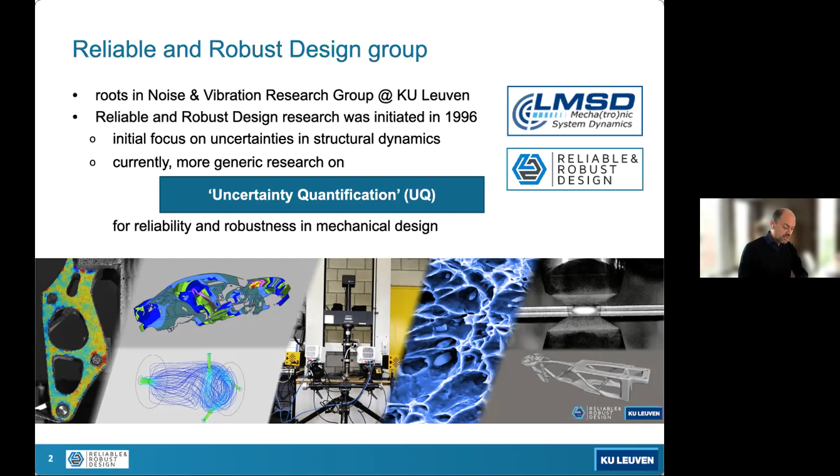Maybe just to give a general overview of who we are, part of a research group, Reliable and Robust Design Research Group, part of a division that is mainly working on system dynamics. So that's also why many of our applications relate to dynamical simulations, but we are broadening towards many other domains currently as well.

We have been doing uncertainty quantification research for quite some time now, and currently the main objective of what we are doing is to bring these simulation techniques, design techniques that introduce uncertainty into the design problem closer to industrial practice, design in industrial practice, but also manufacturing practice, because we see a lot of challenges there in manufacturing.

On the one hand, you have quite fancy manufacturing simulation tools. One of the tools we are working on, for instance, is the welding simulation. They can predict quite in detail what is happening during the welding process. But of course, you are facing a lot of uncertainties there.

So we are not only focusing on the design aspects, what you can do with numerical tools in design, but also in process simulation, for instance, lately.

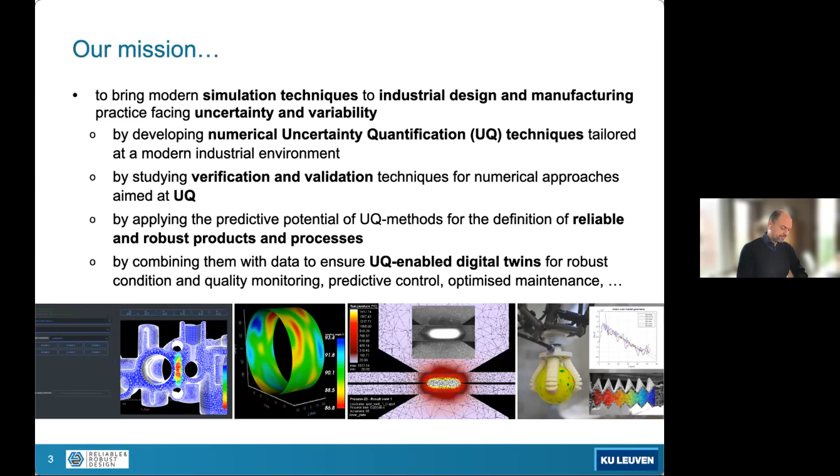One of the goals in this respect is, for instance, to look at UQ-enabled digital twins for process monitoring, to make sure that we are assessing the process correctly, and also that we are looking at the uncertain aspects in what we are monitoring, apart from the other topics that you see on this slide.

The topic I want to talk about today is about interval finite element models, that's mainly what we see in the topic of designing under uncertainty. And it's basically an answer to several challenges that we have nowadays.

We have quite fancy high resolution numerical techniques. So somebody who is facing a design problem under uncertainty usually does not want to reduce the dimensionality or the size of his model to take uncertainty into account. So somehow we have to deal with that.

On the other hand, there's a lot of uncertainty nowadays that cannot be quantified by a single scalar anymore. So we have already heard the talk about random fields. In many cases, it's spatial and heterogeneous, also because in many cases we are facing manufacturing uncertainty.

The typical example that I usually give is the one of additive manufacturing, where you typically have intra-variability within a component. If you look at the design or at the build of additively manufactured components, you very often have variability within the component due to thermal effects and so on during the manufacturing process. But also, for instance, the welding process that I mentioned earlier, of course, is vulnerable to this.

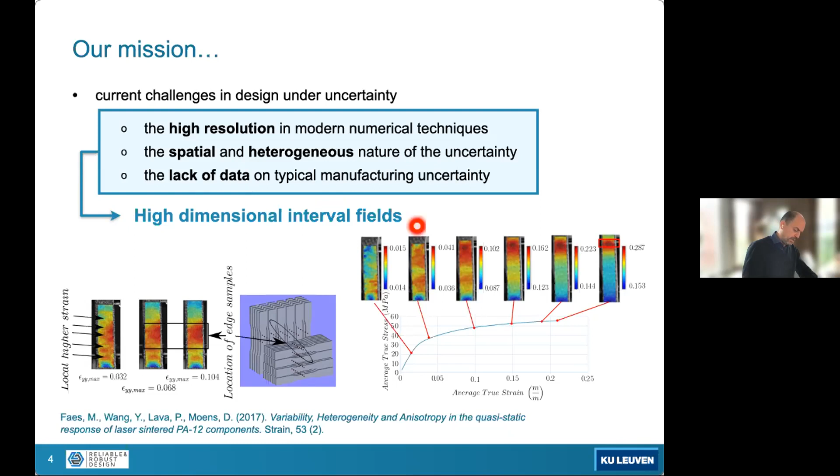And on top of that, you very often have lack of data. So you don't really have all the details to model this, for instance, using random fields. In that case, one possible answer could be the use of high dimensional interval fields.

Let me talk about those and try not to dive too much into the technical details here, but just want to give you a general overview of what interval fields are, and what we did recently to make them applicable in the context of industrial design. And I will show you some applications.

First of all, the main idea, of course, we start from a non-intrusive approach. This means that we start from a nominal case, which is just a finite elements calculation as you would have it from a commercial package. That's the core of the methods, and we try not to be intrusive. That's, of course, the main idea when you want to make something applicable in industry, for instance.

Then, of course, we all know that we can model uncertainty with a probabilistic concept. We focus here on intervals. Intervals make the quantification of the uncertainty at the input side a little bit less challenging, and you only have to know a lower bound and an upper bound. In that respect, they are often rather regarded as sensitivity studies or some large-scale sensitivity studies, rather than actually quantifying, for instance, the probability of failure. This is something, of course, they cannot do.

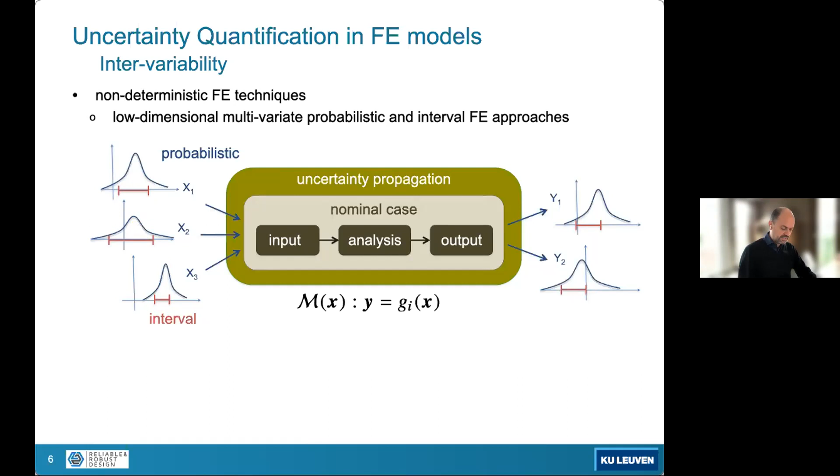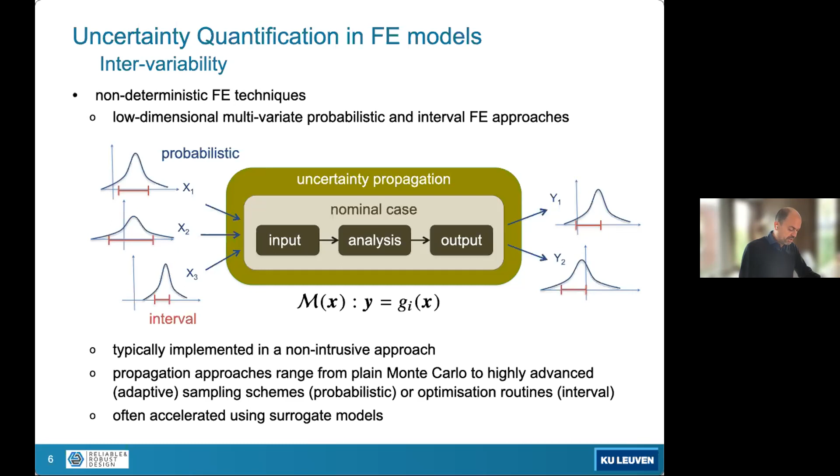So what you put into the model typically are intervals, and what you get out are usually also intervals, since we do this non-intrusively. How to propagate is one of the challenges. You can do sampling, but also highly advanced adaptive response surfaces, which is something we are focusing on recently. Many approaches are applicable, but I do not want to focus on the propagation part in this presentation. I'd rather focus on the definition of interval fields at the input side.

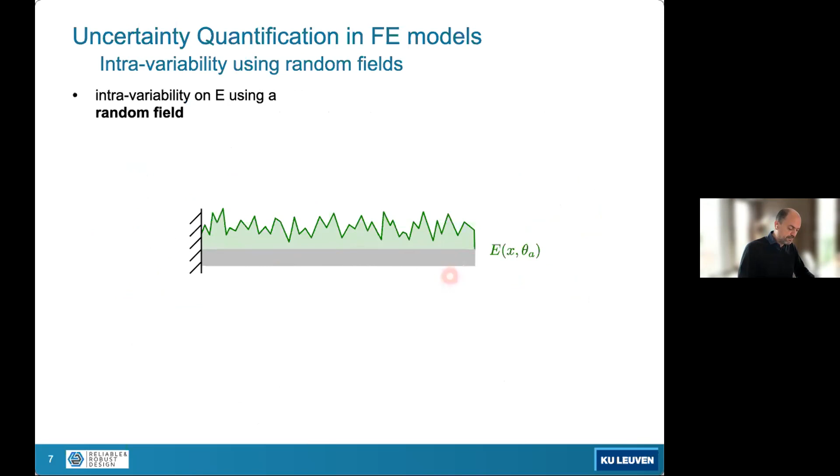I started by looking at random fields. What is a random field? We are quantifying a spatial variation. For instance, in this cantilever beam, we have an E modulus which is spatially varying. We consider every possible realization of that variation and try to have it represented by a collection of correlated random variables over the continuous domain, which then defines our random field.

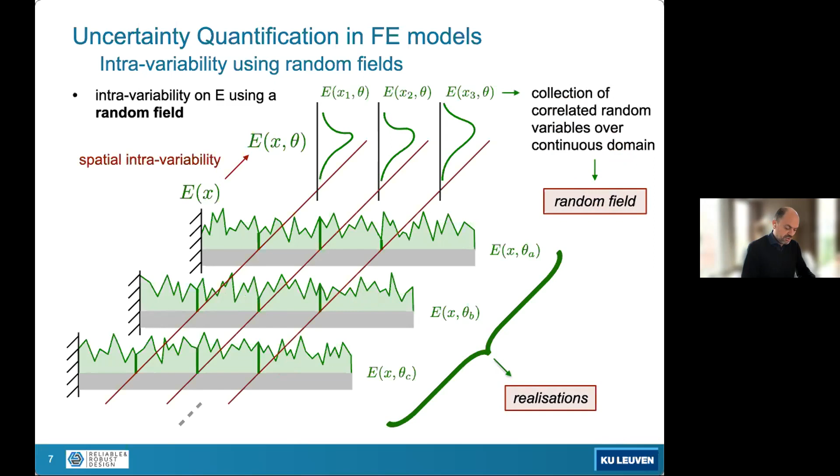That's a mature tool, used already extensively in literature, but still there is quite a threshold to use it in practice, especially in industrial design applications, where the objective is rather to get some feeling of the levels of uncertainty you're facing and whether or not they are relevant. Very often we don't have the time, or don't want to spend the effort to have the full stochastic quantification of what is happening within the model. We have many successful examples, but the main challenge is, what is the correct representation, and how do you do that? Also the propagation can be quite a challenge and take quite some time to model in practice.

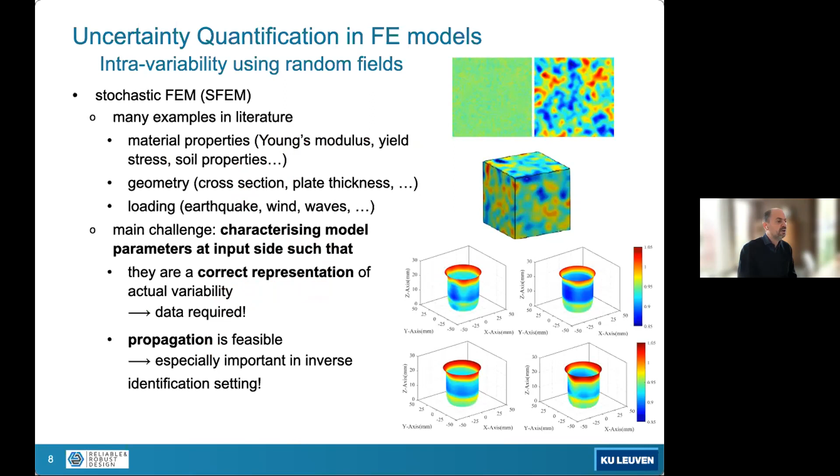So the main question we asked ourselves several years ago is: can we come up with an interval equivalent of the random field by using interval fields?

We somehow want to model a dependency throughout the model. Let's take the same cantilever beam. We don't want full dependency, because then you'd have a single univariate parameter, which is not a field. But we also don't want full independency, where at each node you'd have a fully independent quantity, because then you'd end up with unrealistic realizations. So some coupling has to be defined that represents the spatial dependency, like a correlation in a random field.

We can use them at the input side, but also at the output side of a problem it can be very relevant to look at the actual displacement of this beam in an interval field context. There too, some realizations should not be part of the solution set. So there are quite some challenges to bring the concept of intervals into the world of field approaches.

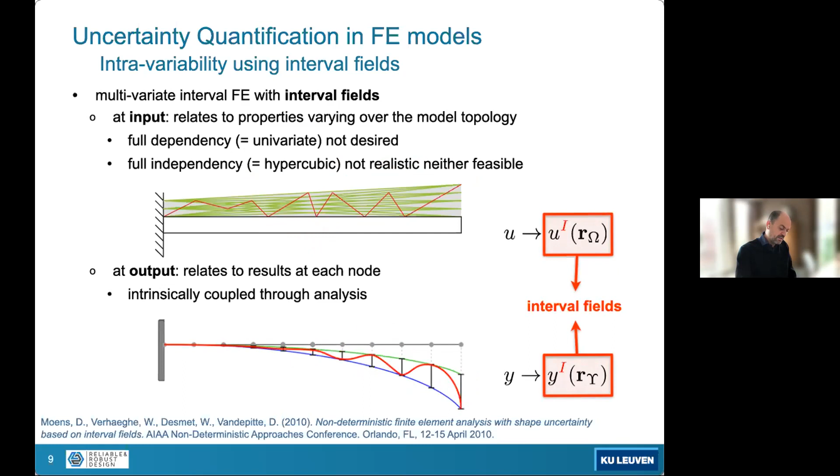That is what we try to do based on a projection, inspired by the Karhunen-Loeve expansion, as we saw earlier. In a zero mean sense, you can write that expansion in this form, where these parameters are your stochastic variables. We define an interval field in a similar way, using some spatial representation which is fixed, and then multiply it with interval quantities in this case.

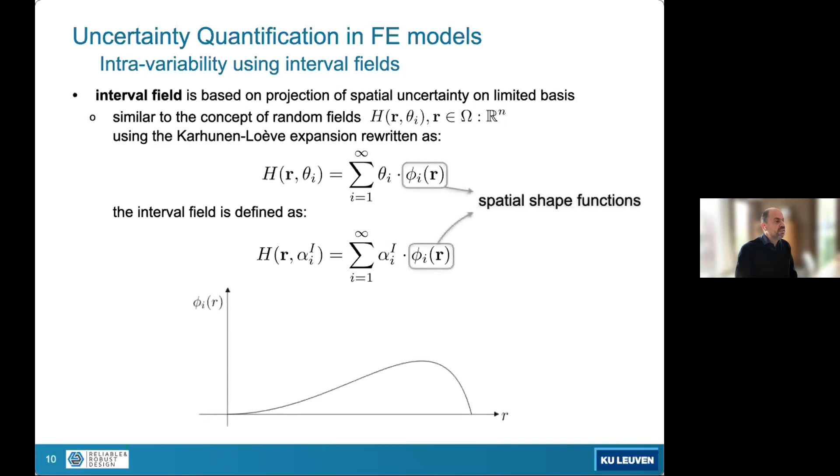So we started from that idea to see how we can model uncertainty with this approach. We inherit the idea of spatial shape functions, but rather than having uncorrelated random variables, we now talk about independent interval variables that scale the basis function. For instance, the basic scaling of an interval on top of a base function would look like this, including any possible realization between the lower and upper bounds. That's the basic idea we started working on several years ago.

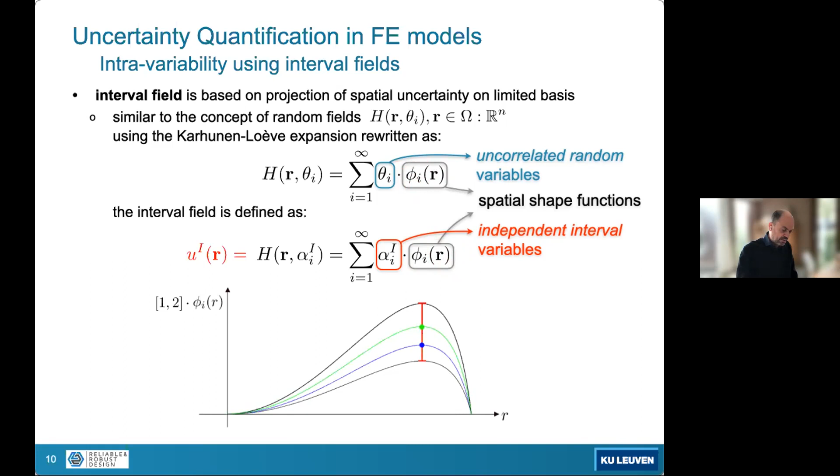The main question then is how will you quantify these? In a KL expansion, once you've defined your correlation structure, you can easily come up with your eigenvectors. But how do you define these base functions in an interval field context? It's not so easy, and we do not want it to be very complex, because we want a method that is easily accessible with a low threshold.

So we started by looking at different possibilities, and we came upon the idea of introducing what is called IDW, or inverse distance weighted, interpolation. What does that mean?

Well, if you would define intervals at several locations, take this as your FE model, an inverse distance weighting function actually takes the distance at every point towards these reference points and uses that inversely to calculate a weight function of that specific interval. Actually, you are weighting the intervals based on the distance. If you would take the uncertainty level in one point, you are using the distances to all reference points to calculate their specific weights to the uncertainty in that point. That's what we called inverse distance weighting.

It works quite well and has a nice advantage that you can, for instance, build interval fields as soon as you have some ideas on uncertainty levels, interval levels at several locations. So that's the basic idea of the inverse distance weighting.

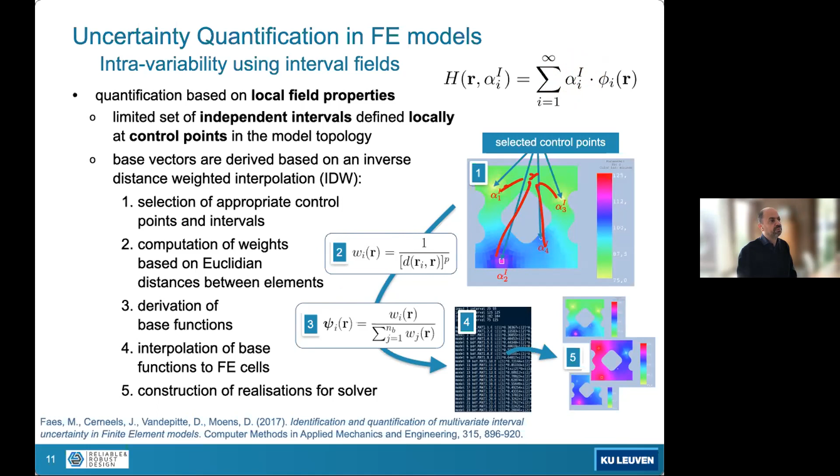And after which, of course, the propagation part is still to be performed. This can be done by considering the interval problem as some hypercubic interval problem, because all these intervals are independent, and that has to be solved. I will skip this because I will not talk too much about propagation here, but just show you how we faced some of the large challenges that we had over the past years when we tried to apply this in practice.

As I said, we try to make the method work for industrially sized models, and then we very often face very high dimensional models where you are having a finite element model with several millions of degrees of freedom. And you do not want to change that. If you want to do a quick assessment of your uncertainty levels, you want to make use of that model.

And then, of course, one of the challenges is that in the inverse distance weighting basis function, you have to calculate your distance measure at every possible location in your domain with respect to each reference value. And that's, of course, when you have millions of degrees of freedom, that becomes quite expensive, and it basically makes the method impossible to apply.

So what we did is we used an alternative grid to define our interval fields, and we even optimized this by using sparse grids that can adaptively refine if necessary. What do I mean by that? It's quite clear that if you look at this inverse distance weighting approach, this p-value here somehow determines the gradients, the possible gradients of your fields over your domain. And that on its turn then defines the required level of accuracy or refinements in the grid that you use.

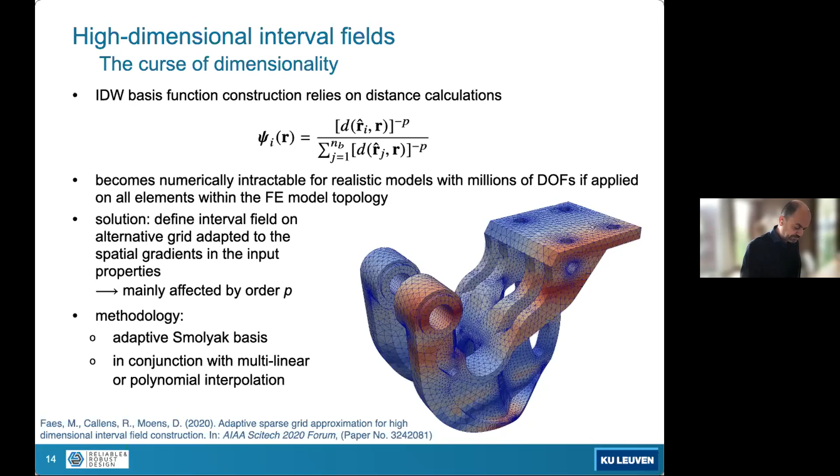We use that as a basic idea to use sparse grids to define, for instance, interval fields on top of a quite dense finite element model, as you can see here. I will spare you the mathematical details, but it basically comes down to the fact that we are introducing sparse grids, and we refine the sparse grids in those locations where we need them. Then we can reduce the amounts of distance calculations that we have in our basis function definition.

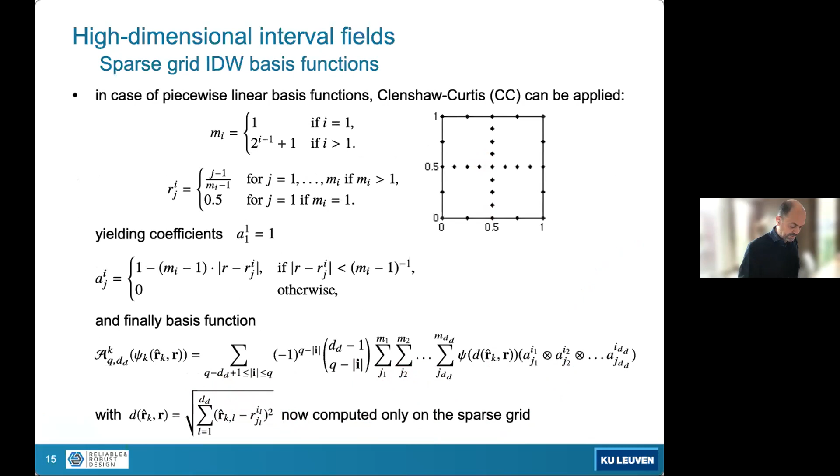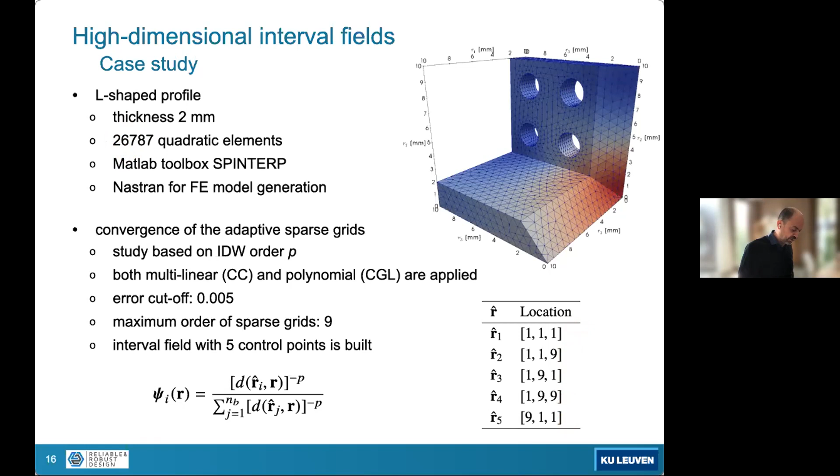Just to show you an example what that means, in this still rather small model - it's not yet of the size of what we had in mind, of course, with about 26,000 elements here - but we used it as an example to study. We defined some uncertainty levels at several locations in this domain, and then considered interval fields based on the p order that we have here.

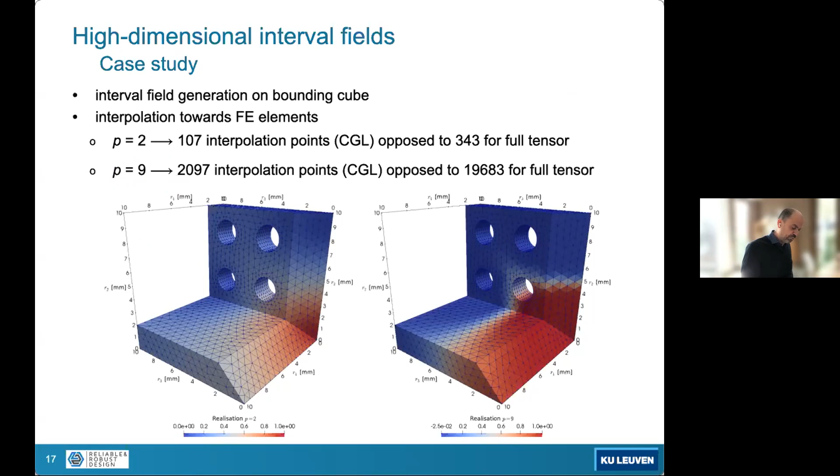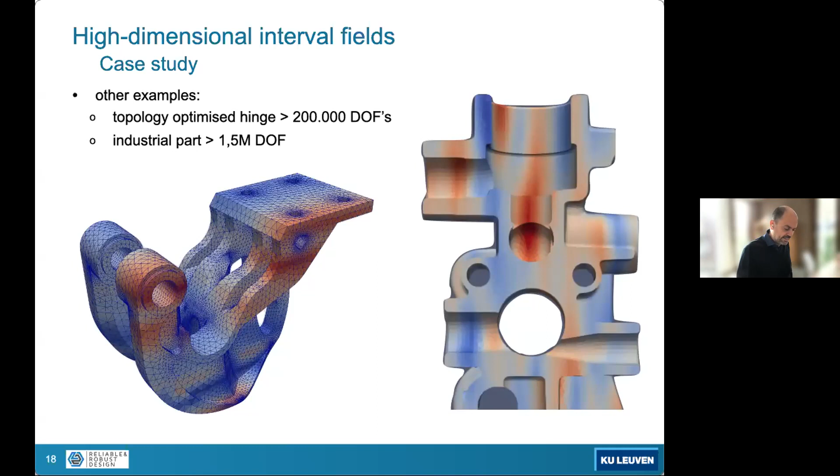We applied this method on this toy problem, but I've also worked on the method in more detailed models, and even collaborated with industry - I cannot tell you with whom - but this is actually a part that we studied with over 1.5 million degrees of freedom, using the interval field approach to quickly assess the uncertainty levels they were facing in the casting process of this component.

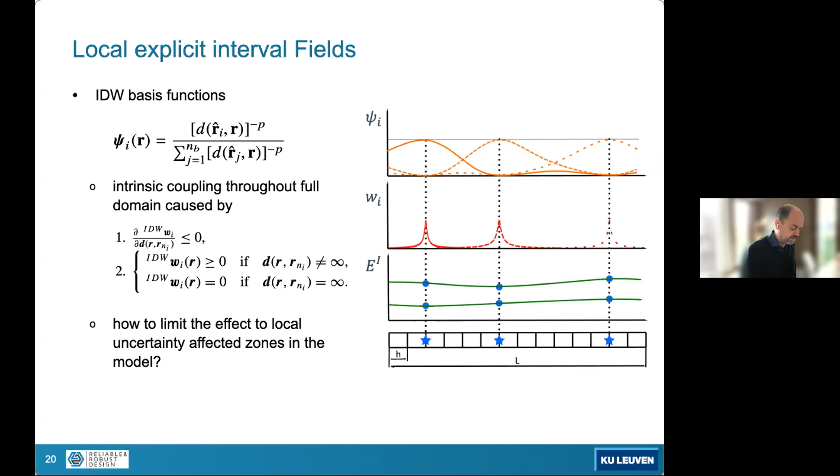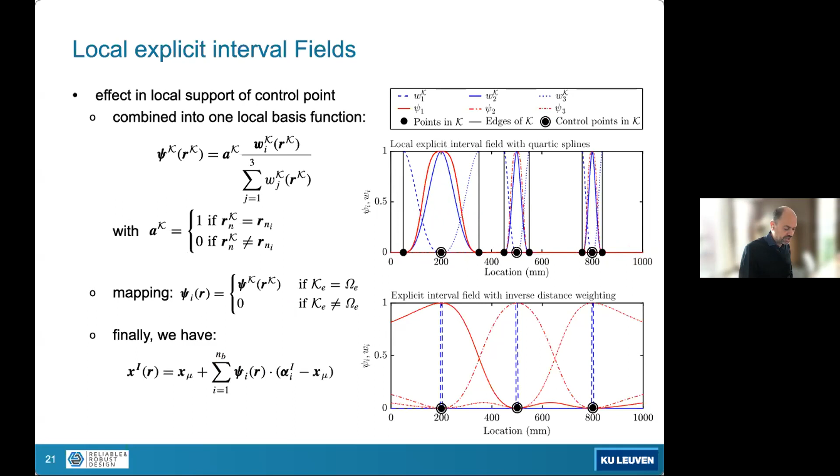This is something we cannot do with classic inverse distance weighting, because these base functions tend to be present all over the domain, since they are defined by distance. So we came up with what we call local explicit interval fields. I won't go into too much detail, but the basic idea is that the basis functions are forced to be zero outside of a given local domain you define—some sort of radial basis function forced to zero at certain locations. That gives a huge difference.

This is, for instance, the same 1D model where you have three intervals at several locations. This is what happens when you use inverse distance weighting, and this is what happens when you use local explicit interval fields. You can see quite clearly that these become quite independent uncertainty levels at several locations, while in the other case, all the realizations show they are still coupled.

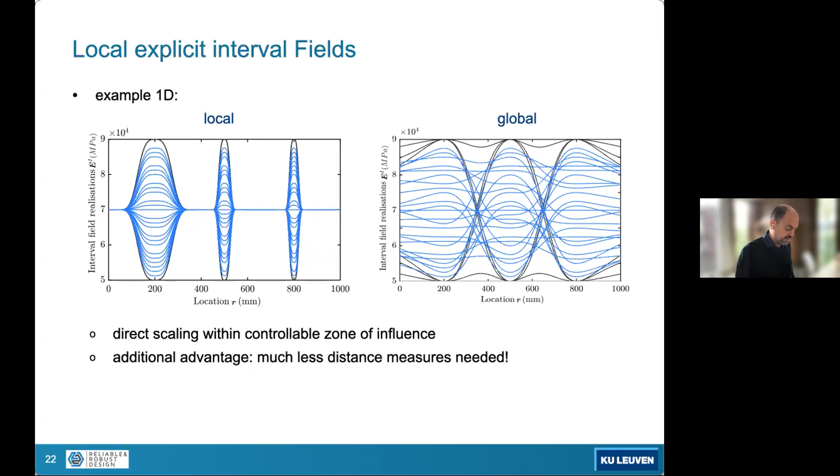An additional advantage here is that we need much fewer distance measures, because we force the base functions to zero at large parts of our domain.

To show you what we can do with this, here's the same component I showed earlier, where we introduced intervals, for instance on E moduli, at several locations. If you are facing a problem with respect to the manufacturing of the component, and you have observed locations where the problem is, or where your component is quite sensitive, you can introduce your uncertainty very locally at those locations, and then come up with an assessment of the uncertainty levels on, for instance, stresses in your component.

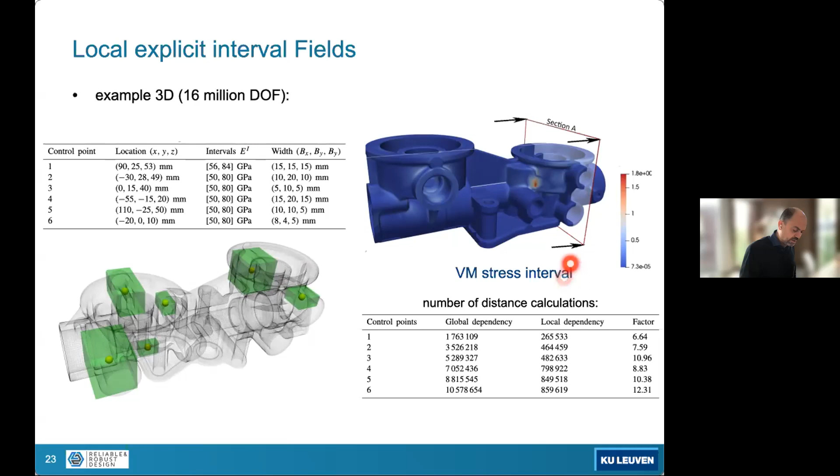One last recent development I'd like to share is about auto-correlation or cross-correlation between intervals, because that's quite a topic in the literature. In classic interval analysis we don't really have a tool to deal with correlation between intervals, so you have to go to convex approaches or convex analysis.

We also study this in the context of interval fields. Basically, if you are looking at intervals and want to couple them, one way is to use the concept of admissible sets. This comes down to defining copula functions—bivariate copula functions between any combination of two parameters—and then nesting them into a multidimensional representation of your copula, what we call admissible sets.

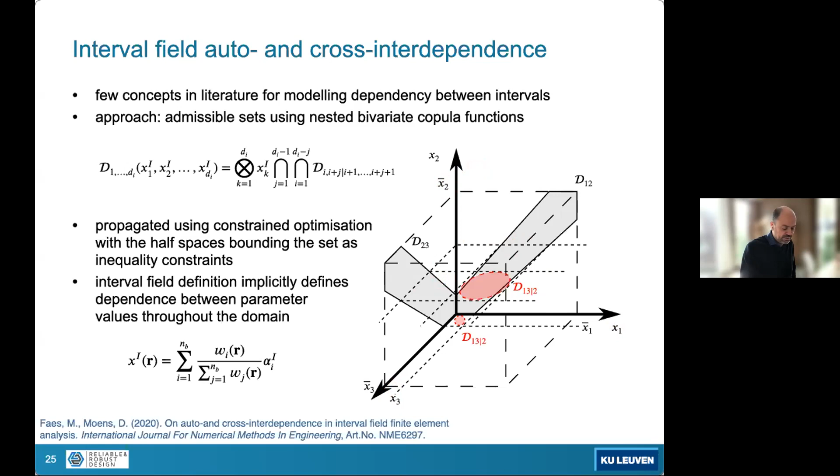To give you the general idea in the context of interval fields: you can't apply this at each and every location in your model—that would be infeasible. But you could use the independent alpha i's I introduced earlier, the intervals at independent locations in the model, to build these admissible sets and link what is happening in between those. This takes the method I introduced earlier, where we had independent intervals at every location, to the next level, where you don't necessarily need independent intervals at those locations—you can introduce dependency.

The basic idea is that with several locations, you can link them two by two in such an admissible set, but you could also work with cross correlations. So if you have two interval fields that should somehow be linked or related, you can use this method to define dependencies between cross correlations between the two fields I show here.

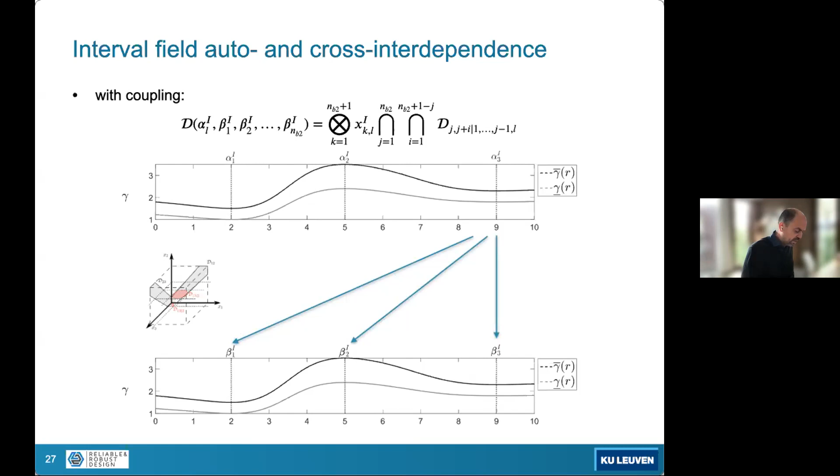I'll skip those slides to be able to tell you a bit about recent applications, and to keep my presentation on time.

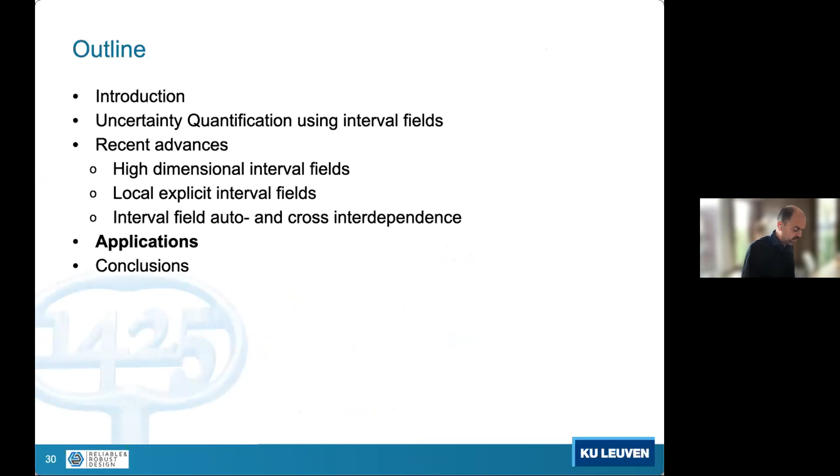One of the applications I wanted to share that we did recently is in crash analysis. As I said, we focus on complex problems and large finite element models, and crash analysis is quite complex and very sensitive to many uncertainty levels.

One of the main uncertainties is actually the boundary condition. They're crashing this box into a rigid wall, while in practice this is of course not rigid. In an accident you have a compliant structure that you crash against. So what is the performance then, and how should you take that compliance into account?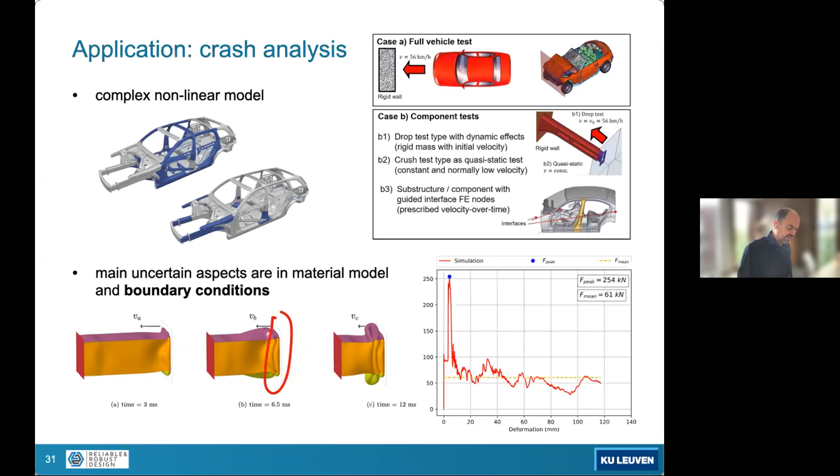This is one of the things that we tackled using interval fields. You could say, okay, you define some sort of stiffness with respect to the environment using some springs, and then you can do this in a scalar way, and you get some intervals on, for instance, the peak forces and the mean forces. Then you don't really have a field approach. You don't really need a field approach.

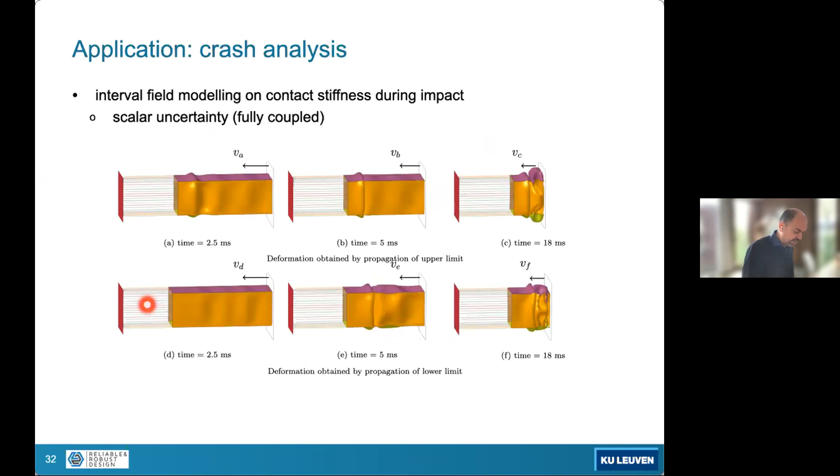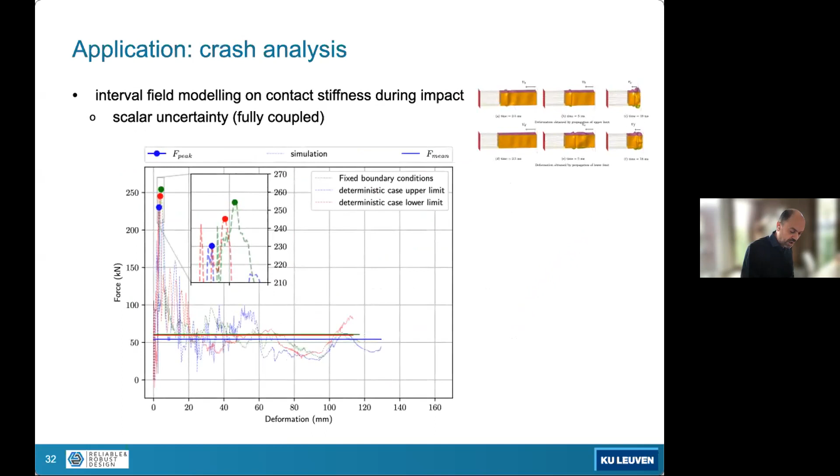But you could argue in this case, if you would introduce a compliance between the structure and the environment, it's not really defined in the first place how that compliance is distributed. So there could be uncertainty, spatial uncertainty. So what we did is we defined interval fields to define the stiffness with respect to the environment here.

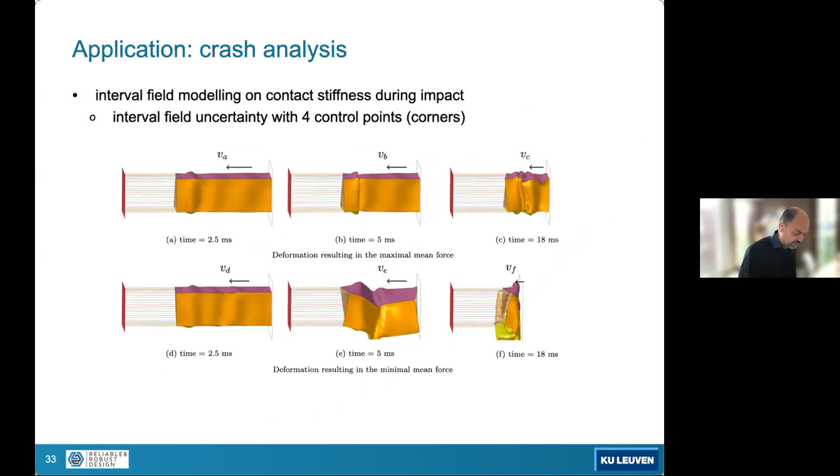And of course, then you get all different crash modes, as you can see here, that will result in quite different peak forces. This enables the analysis to be much more representative for actual crashes, because these are cases that are likely to happen.

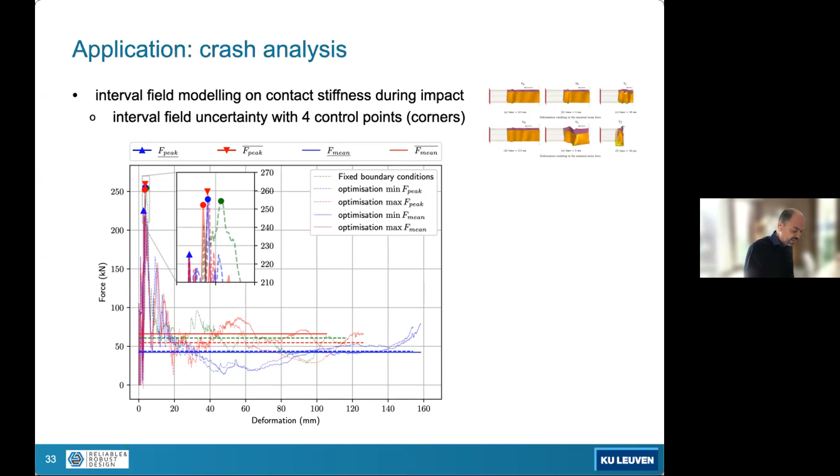What we found out is that the amount of uncertainty that you get when you introduce this in an interval field kind of approach is substantially larger than when you do not do this. That is because you get many different buckling modes, especially because your stiffness is not evenly distributed with respect to the environment. So quite an interesting study here that can tell you, you do not know the actual uncertainty levels very often, but at least you can assess somehow the uncertainty level that you have, or the sensitivity of the approach you're using with respect to the spatial uncertainty levels that are in your structure.

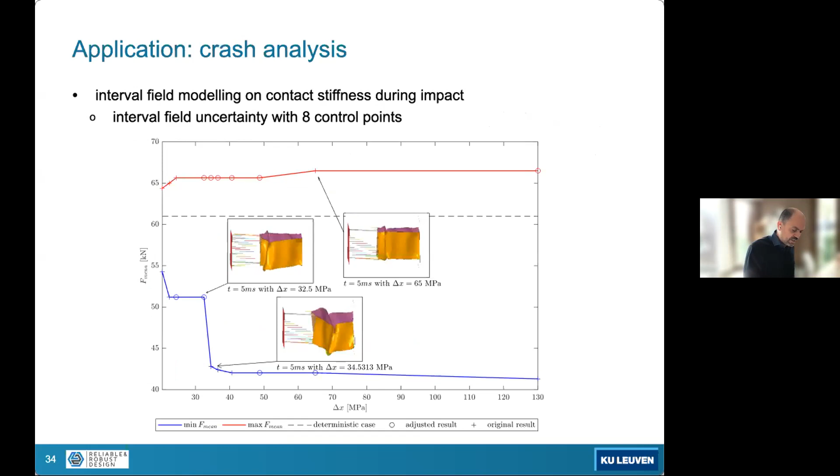This is the same analysis, but with 8 control points. I will skip that as well.

The final application that I wanted to share here is basically the question we ask ourselves: okay, we have these interval fields, and how do these compare now to random fields? To what extent can you find an analogy? We already discussed the analogy in the definition phase of the interval fields with respect to the random fields. But if you propagate to the results, can you choose between them, and what about the results?

And what did we do next? Well, we tuned our interval fields using an approach that I did not really discuss here, but such that the gradients that we have in our interval fields somehow are similar to what we get in our Gaussian realizations of the random field. So that's the analogy that we try to implement. And also we force the global bounds to be at plus or minus 3 sigma, again, of the full realization set.

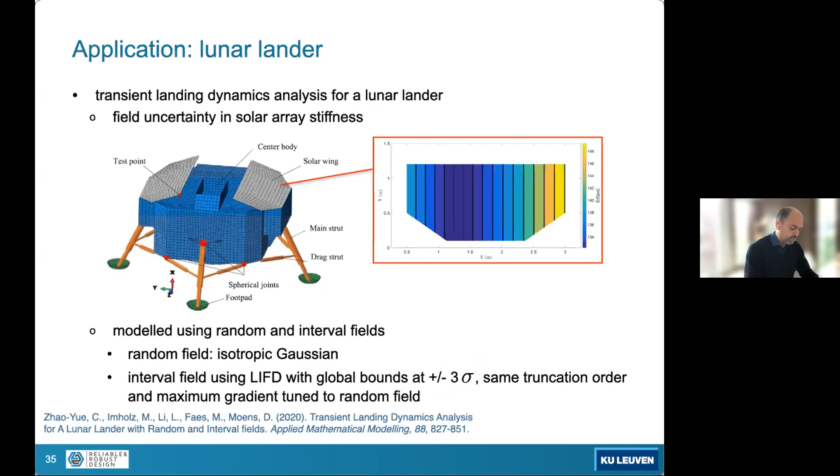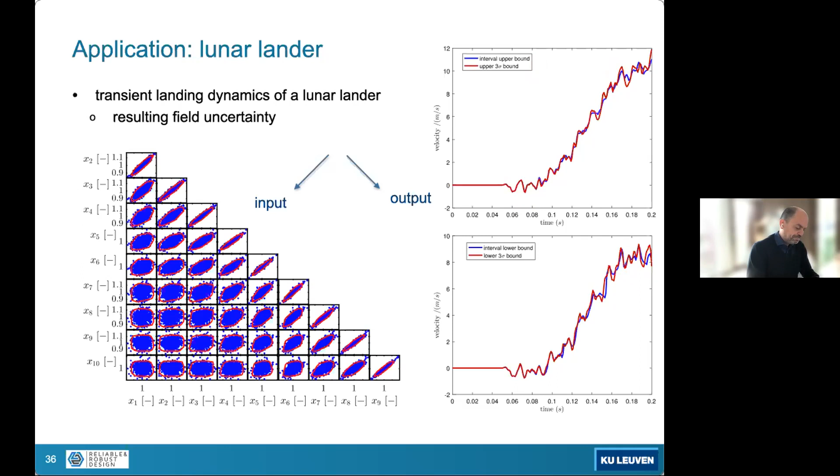You could even say, well, if you want to do the uncertainty assessments on what is happening in your model, they score quite equal. This work has been published, so you can look for the details in that reference.

So to conclude, I discussed the interval fields using mainly inverse distance weighting. We are working on quite some methods to have them applicable in industrial sized problems. I discussed sparse grids, local basis functions, and multivariate analysis. And we believe that interval fields can really be an alternative, not really a competitor, but let's say complementary to random fields when you have scarce data, or your objective is mainly to have an assessment of the sensitivity of your analysis towards spatial uncertainty levels.

And with that, I'd like to conclude my presentation.